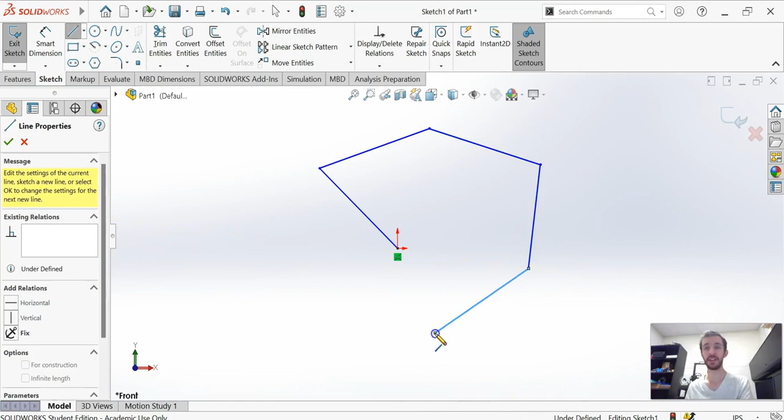Okay, before you can do anything three-dimensional, you have to first have something two-dimensional. So we can start with any basic shape. It just has to be a closed contour. And when I say closed contour, it simply means that whatever the shape is, it has a series of lines that, for one, do not cross, and two, that if you follow them, you get back to where you began without ever crossing the same line twice. So this is a closed contour.

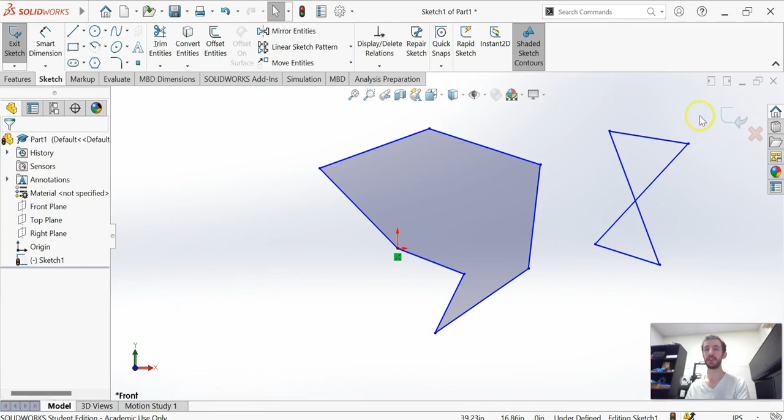This makes SOLIDWORKS angry because these two lines are crossing and you can't cross a line and have a closed contour. You can do something like this, which would look very similar. Let's make sure this works right. But this is different because this is two closed contours, not one. This is two separate line segments. You see how I can highlight both of them. This not closed contour, this one closed contour. Okay, so with that in mind, I'm not going to pick something this horrible to make into a three-dimensional shape. I'm just going to start with a box.

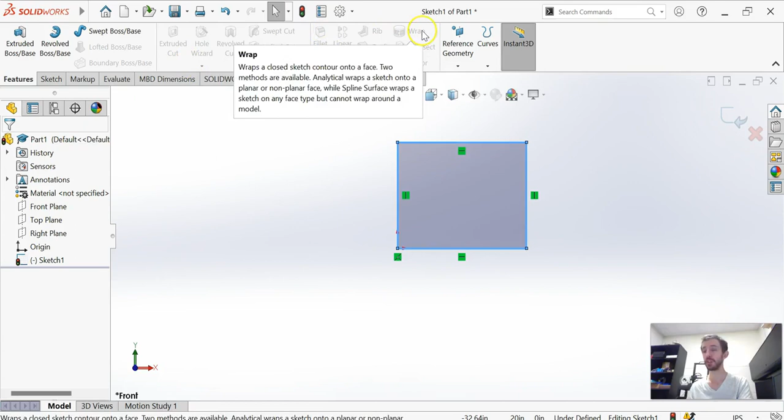Now, once we have a closed contour, we can go on. And where we go is to the Features tab, which is right up here, and we click on it. Now, the great thing about this is that most of these are going to be completely, just, you don't see them. They're all grayed out. The reason for that is a lot of these require something three-dimensional to actually work. So, all I have is 3 buttons right here, and we're only going to talk about Extruded Boss/Base today.

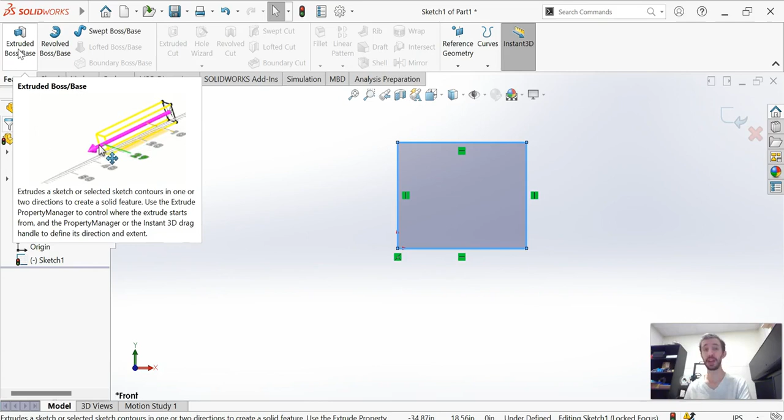Now, when you scroll over it, you'll see a little GIF showing an extrusion. Extrusion is when they have a shape made of a strong piece of metal, and they stuff the metal through it. When they stuff it through, it comes out in the shape they want it. So with this, I can set a distance, and I can make it as big as I want. I can also just drag this little orange arrow here. It'll turn purple and I can see what length I've gone. And I can drag it either way.

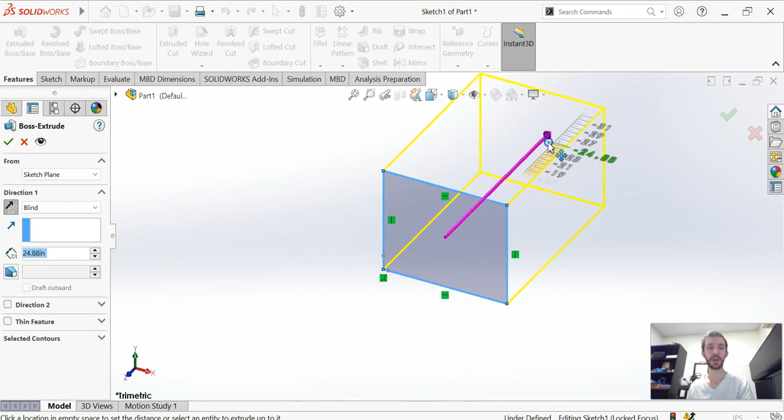One little detail that I'll go into right now, because there's a lot of options here, is that if I want to, I can switch the direction I want to go. If I click on this button right here, it goes the opposite direction. This is important. You'll see this quite a bit. So that is the big detail for this guy. But I'm not going to just leave you there because there's a lot of other little details too.

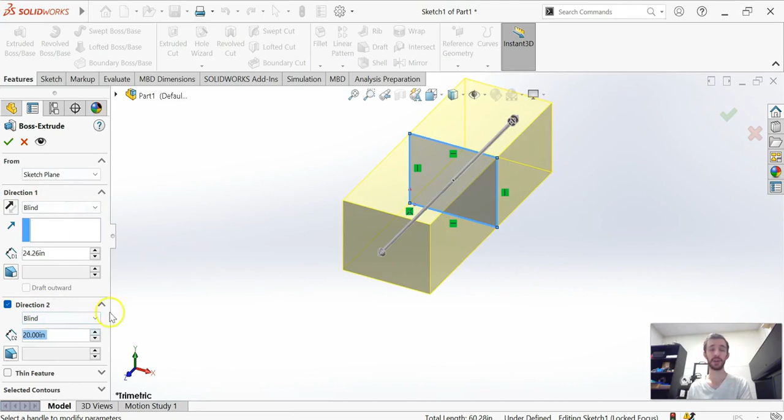You might not notice that there's a second arrow over here. I can actually extrude both directions if I want to. So now you see there's a direction 1 and now there's a direction 2 right here. So they can be different lengths. I can make them the same length if I want to. Both work. Another thing is you see this thing right here, blind.

Like, okay, what does it mean by blind? Is it that I can't see it? It's just going straight away from this without looking where it's going. That's the important thing. It's moving forward blind. If I had a second shape over here, it would be completely fine extruding into that shape and then through that shape. It can go magically all the way through it. I don't have a second shape right now, but it's called blind because it's just going straight, not looking to see where it's going, not looking to see if it's going to hit anything.

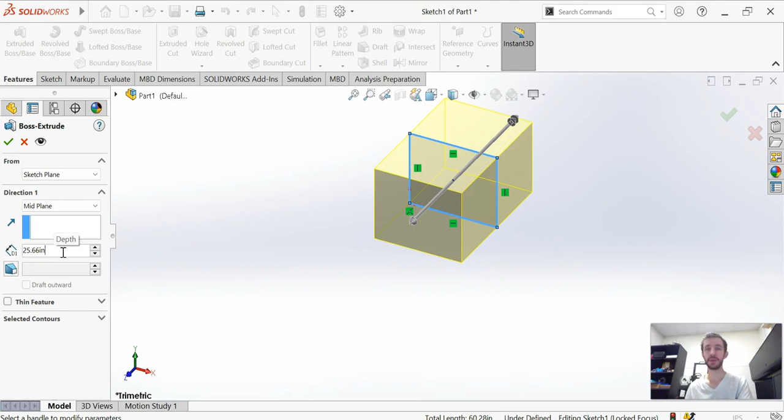There are other ones too, and there's a lot of these. And I promise you we'll get to the rest of them later. The only one I'm going to talk about right now is midplane. And offset from surface, I'll do that one too, because we got a little bit of extra time. So midplane, as you can see right here, it's like the two-direction one. However, it's just saying I'm going to go both directions the same amount. It's a nice way of keeping your features centered on the origin if you want to. You don't have to use this, but sometimes it's helpful. And there you go.

Another thing I can do is offset from surface. So what surface am I going to be offset from? I have to choose a surface. Usually you do this if you have another feature. I can go back to here and click on my front plane, and I can be offset from that if I want to. Okay? So let's get it right now. Right here, I'm currently on my front plane. Okay? Make sure I did this right. Looks pretty good here. And it's going straight from that. Let's see. There we go.

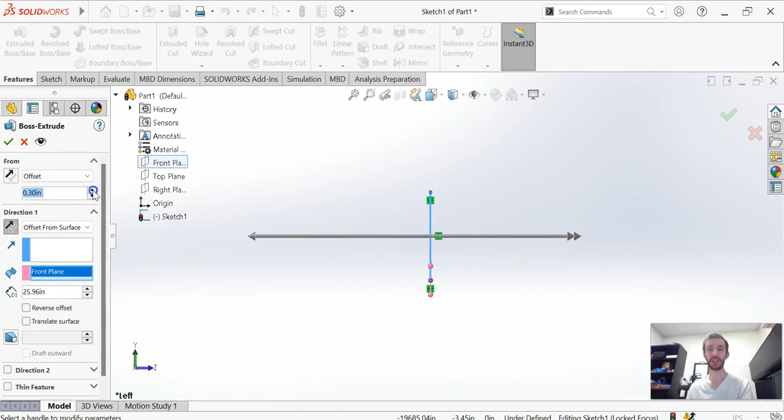It's not working like it's supposed to. It's supposed to be, oh, I feel stupid. I'm sorry. I meant this one. Okay, my bad. There's another one which is called offset, which actually moves where you're projecting from off of the plane. So now you see, look, it's off the plane. Ah, mixed those up. My bad, my bad. Okay. So we'll come back to offset later. For now, though, just blind and mid-plane.

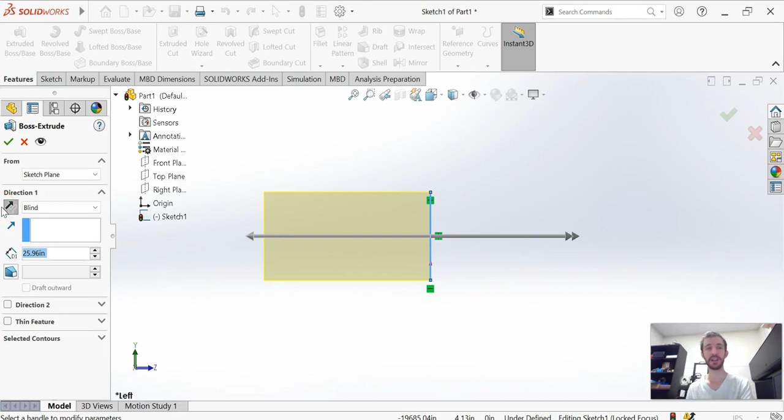As a note, mid-plane is not 25.96 inches in both directions. It's 25.96 inches from the front to the back. You can see that when I go from blind to mid-plane, it's the same distance. It's the same length. Now there's a whole lot more options here. So this is not the only video we're going to have on this one button. So you're thinking, oh man, not really many buttons here. We got to kind of dig in deep before we move on. But this is enough for this time.